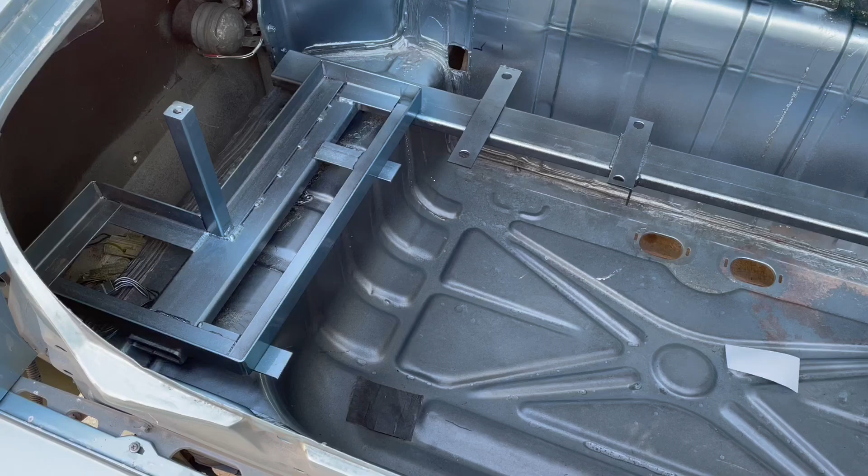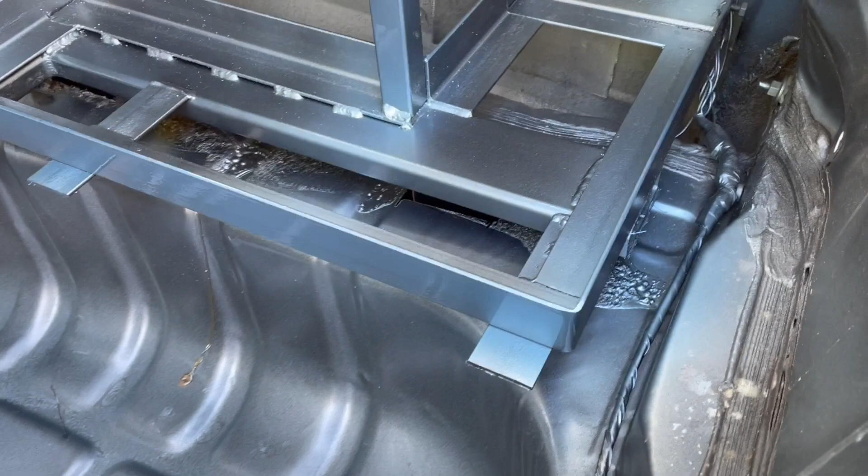Alright, so I went ahead and based and cleared the rack. The parts that you're gonna see, which is really just that. I put a little base back here just to protect it a little bit, but none of that's gonna be seen.

It's gonna be all covered. So now I'm gonna go ahead and paint the batteries, base coat and clear coat, and those are gonna be navy blue. So that's next.

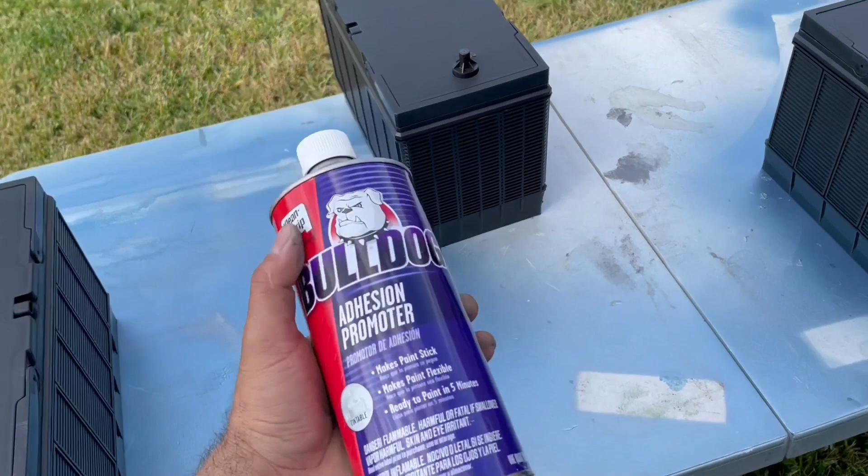All right, here are the batteries, guys. So anytime I'm painting batteries or anything plastic, I use an adhesion promoter. This Bulldog is pretty much the best in the business. I use this on a regular basis on anything plastic or flexible. It works great. So I did wax and grease, cleaned them up real good. They're brand new batteries, but they've been dusty, moving them in and out of the trunk for fitment and everything. So wax and grease, I'm gonna hit them with the Bulldog adhesion promoter and then let it dry and then go straight to base and clear. I do 2 coats of base and 2 coats of clear. So I'll bring you back when I get closer.

All right, there you go. 2 coats of base, 2 coats of clear. Came out really nice. It's a midnight blue. Oh, a little bug right there. Gotta get him out. Get around to this side.

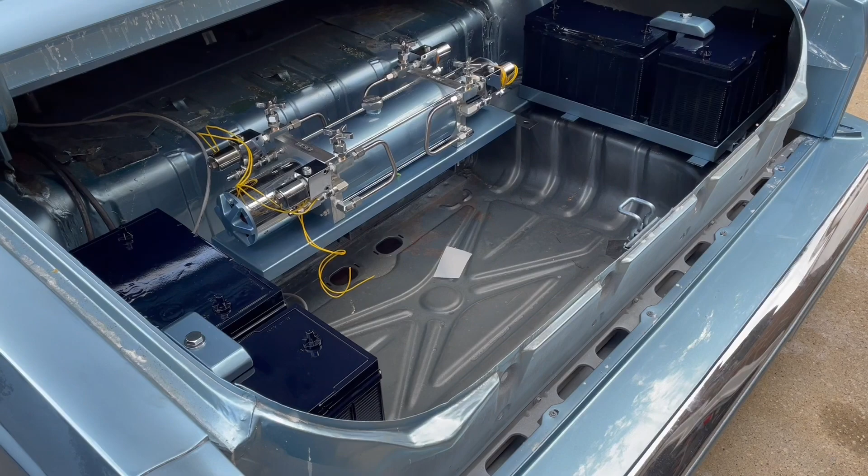Really like this color. It's really dark, looks just like the interior. So here it is with the batteries, guys. You can see the color a little bit better on the batteries now, I guess, now that it's up against the light blue. Came out real nice, I like them.

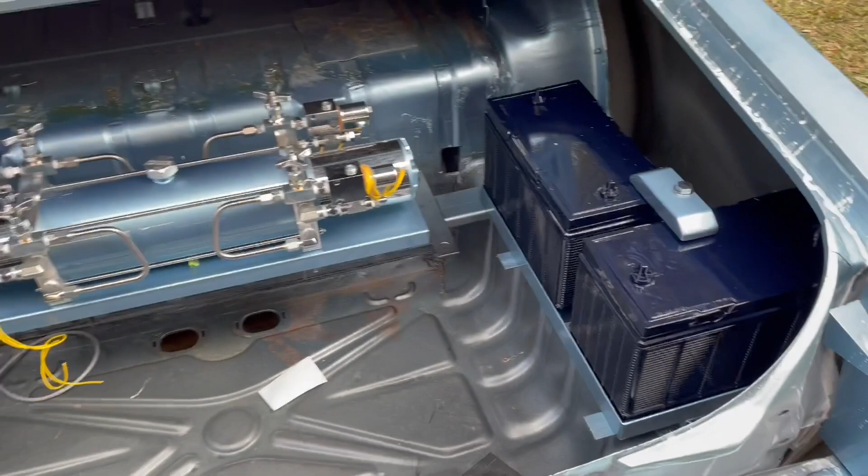Rack came out nice. This is shiny. I like the hold downs.

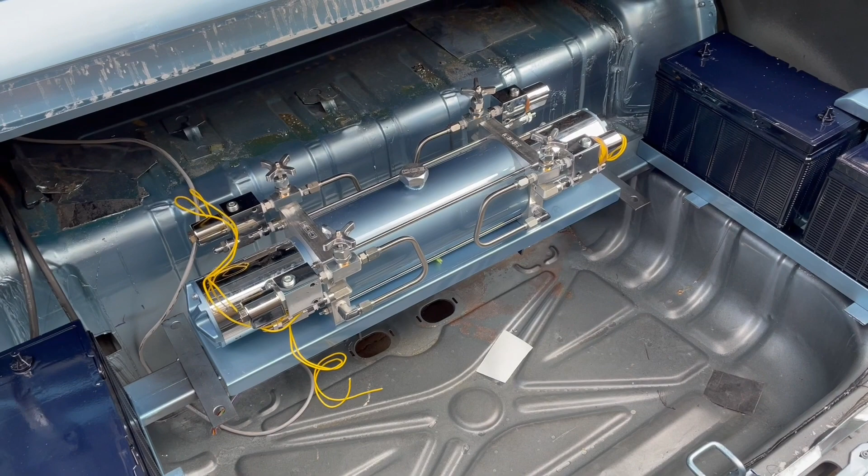So you see it coming together now. I still need to hard line the dump wires, so I'm gonna have to make some holes on the pedestal and just run the wires through the bottom so it can be hidden. Everything's gonna be hidden as much as possible.

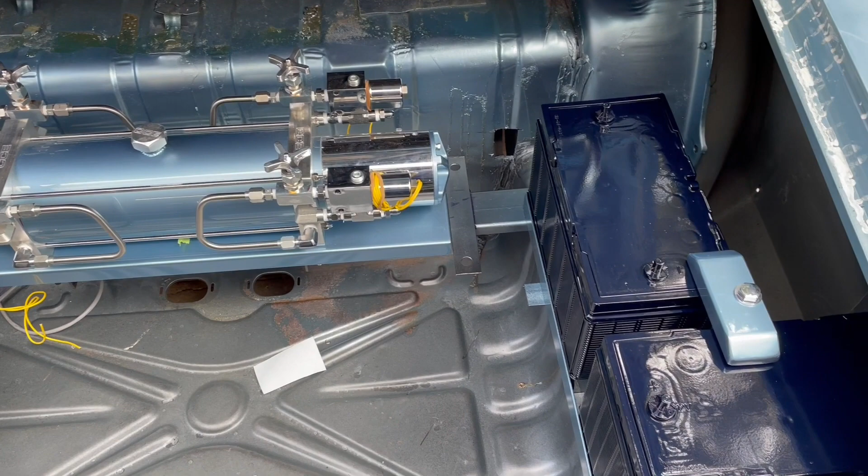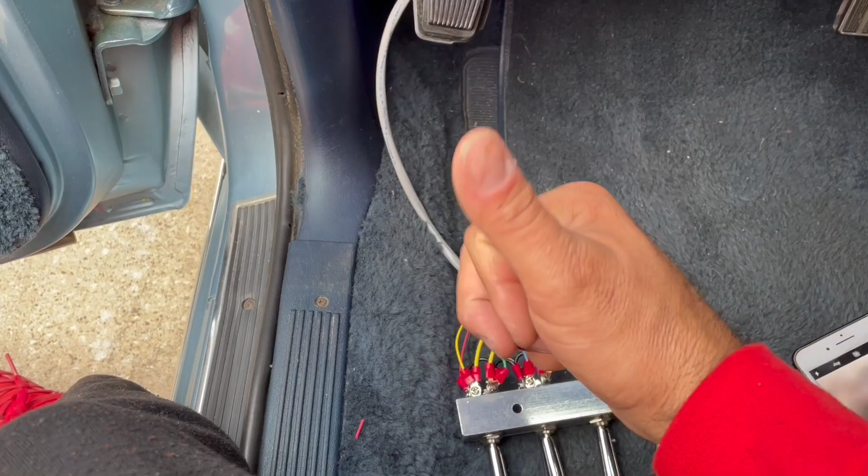All right, so I had already ran the wiring to the back of the trunk. My boy Lone Star came and wired this, and he finished up the hard line for the pressures while I worked on the cables for the batteries and just running other wiring.

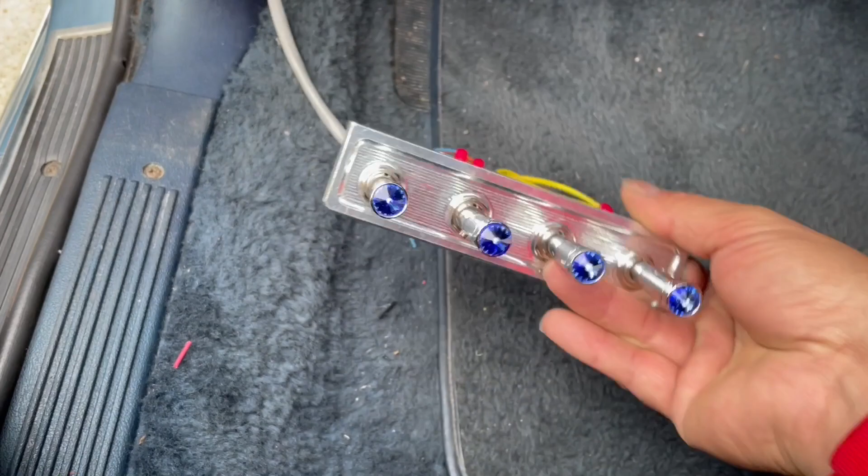So I just wanted to show you the sequence of the switches. It's kind of hard to do this with one hand, but here's the wiring. So you got 7 wires, right? 4 for the dumps, 2 for the pumps, which go to your solenoids front and back, and then red for the 24. So right here, front is going to be this switch.

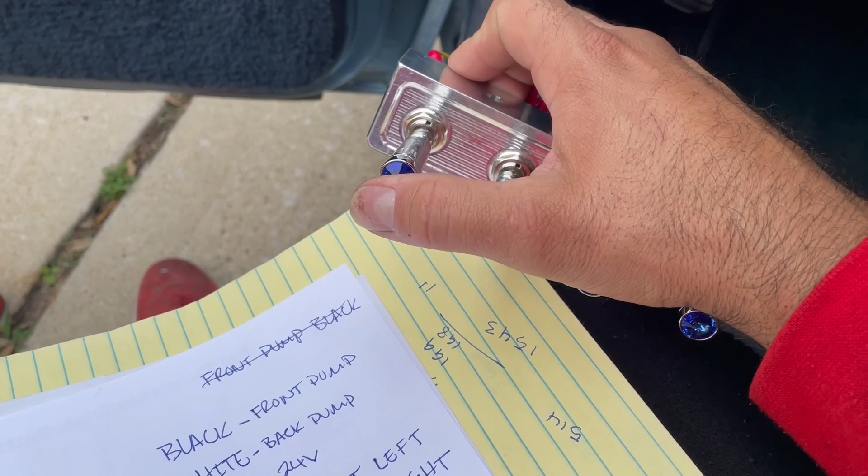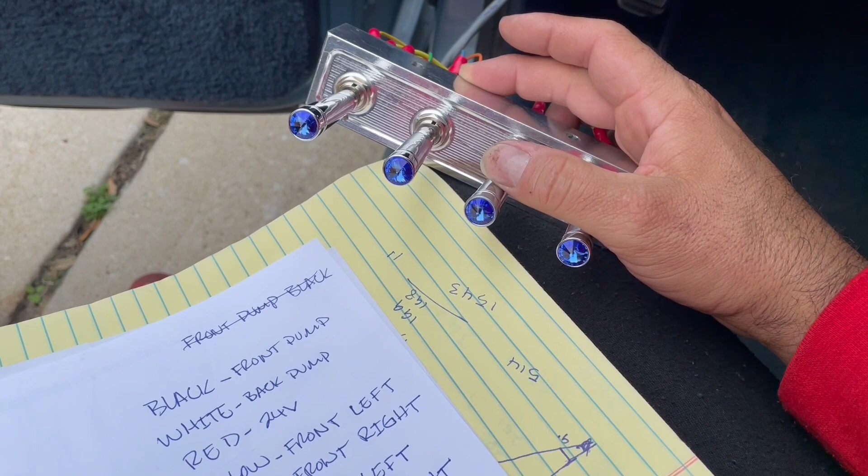This is up and down front. Second switch is up and down back, and then the third and fourth switch are the dumps. So if you go down, it's going to be left and right for the back, and if you go up, it's going to be left and right for the front. So these are just dumps. So front, back, and then your dumps.

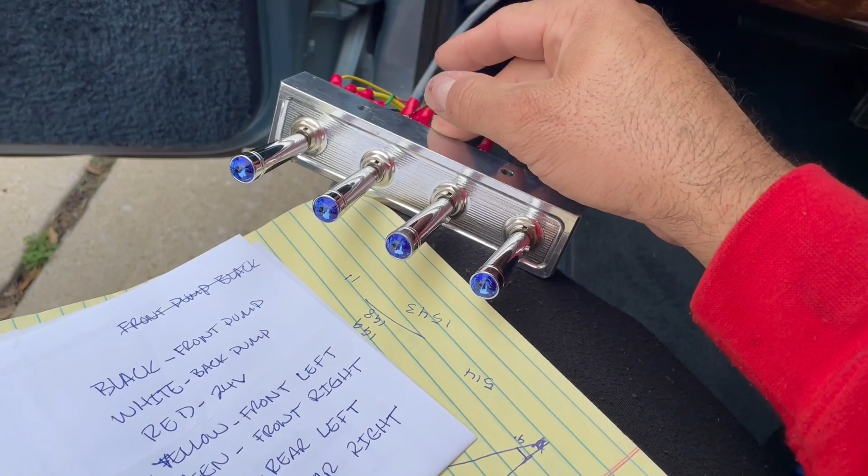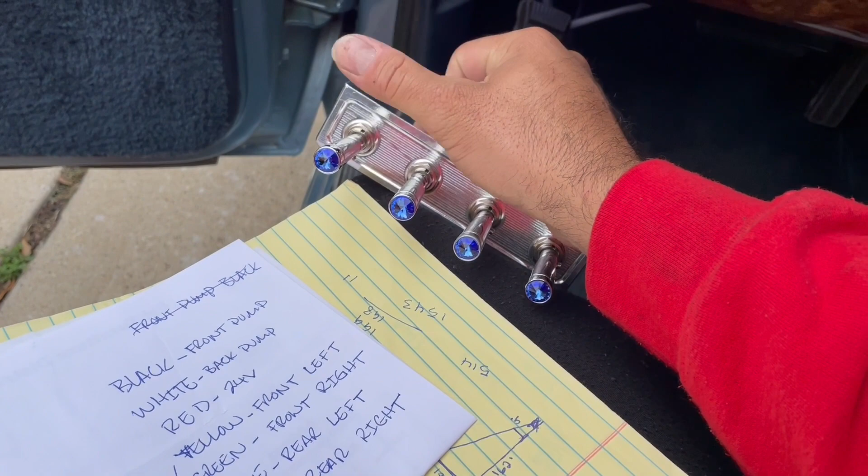On the Rocket, I got it set up a little bit different. So on that one, it also has 4 switches. It's got front, back, and then this one's like a whip. Like if you go up, the back goes up, and if you go down, the front goes up. So it just kind of whips up, front and back pretty quick.

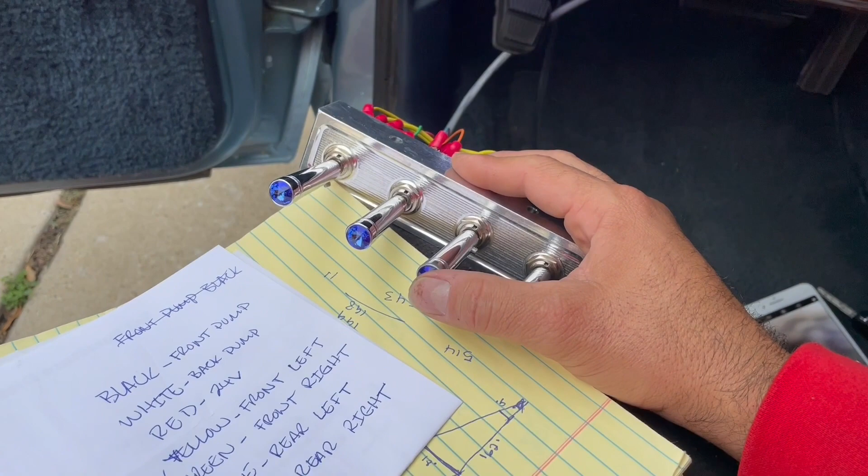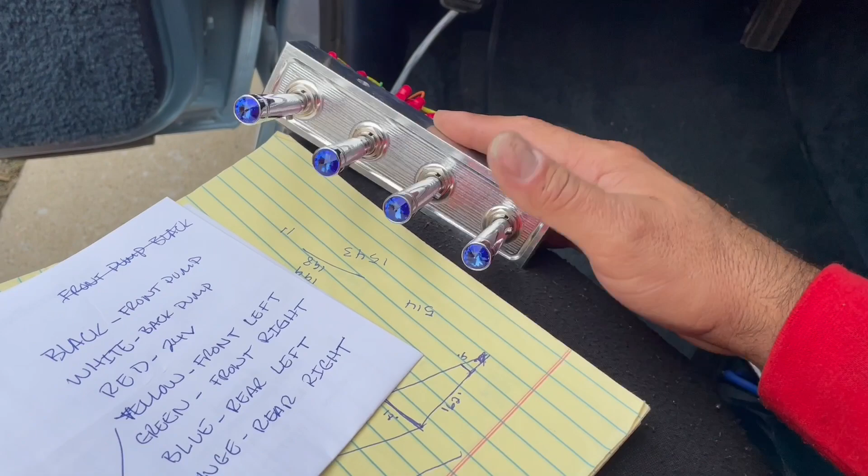And then the fourth switch on the Rocket is the corners. Down is right, and then up is left for the rear corners. So there's a lot of ways you can wire these things.

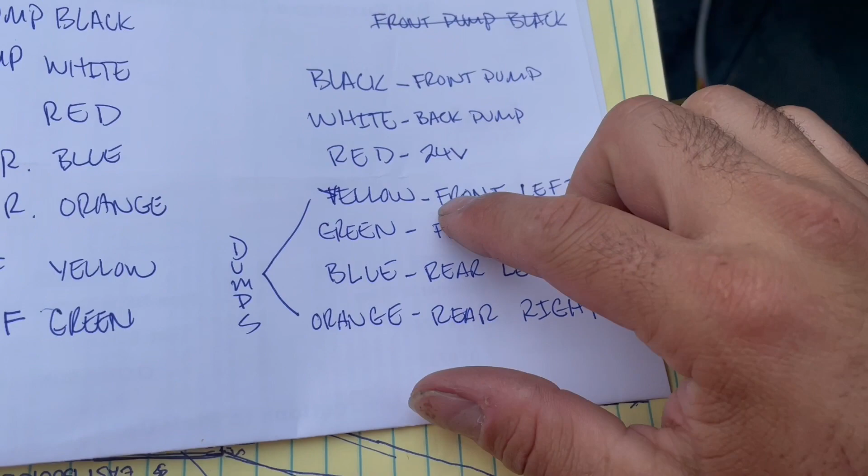So I just wanted to go through the wiring on here, and also to keep a reference for myself, because sometimes I go back and I gotta relearn things. So here they are, here's the wiring. Again, 7 wires, right here and here: black, white, red, yellow, green, blue, orange, and here, there. This is how they're wired on the switch panel right there.

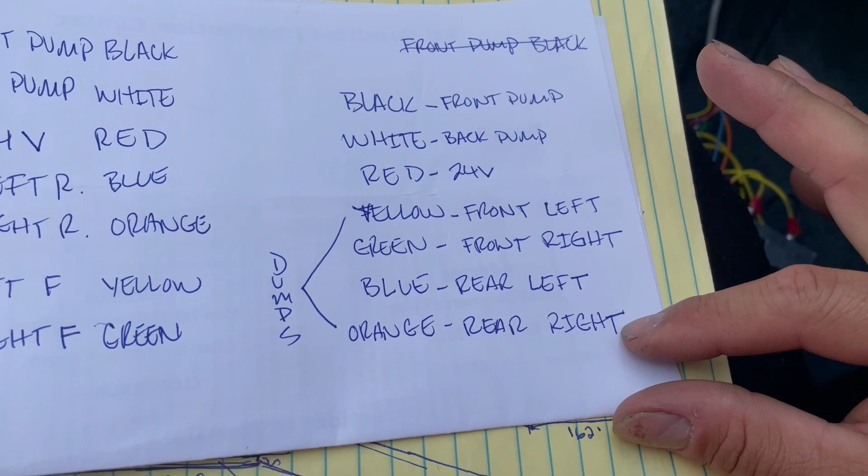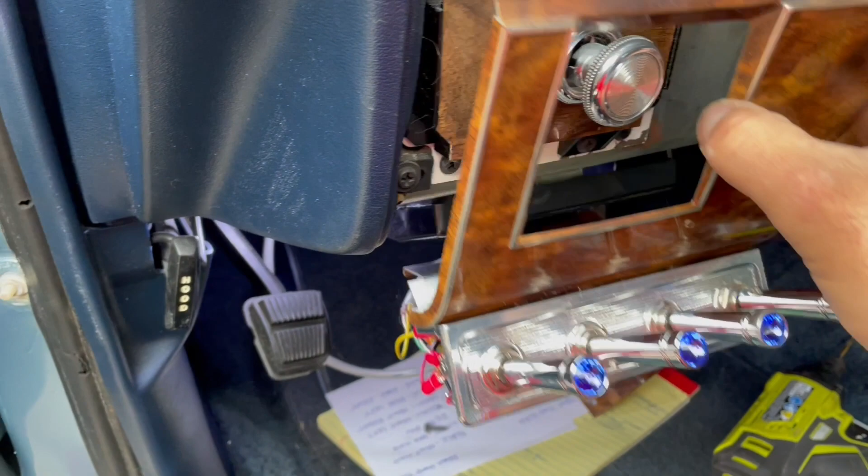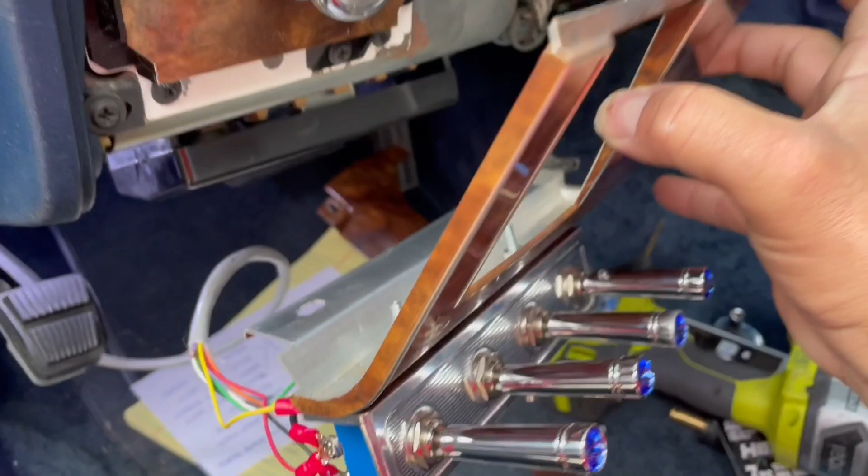All right, so I'm gonna use this panel right here for the switch panel. I haven't screwed it in yet, so I can show y'all. So this is aluminum, it's not wood, it's not real wood grain. So there's your 2 screws right here, and they don't interfere with anything there. So I'll go ahead and put this stuff back together, and then I can put my switch wire up.

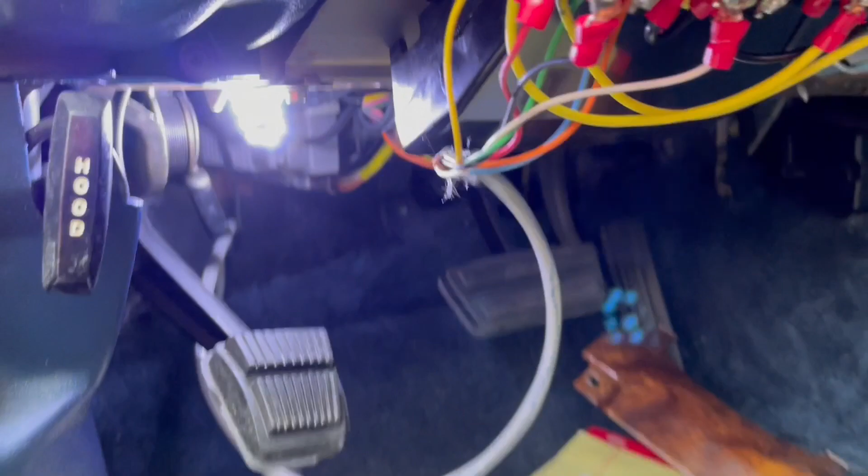We also got some LEDs. They're really nice, they're really bright. I don't know if you can see the one over there. Some over here.

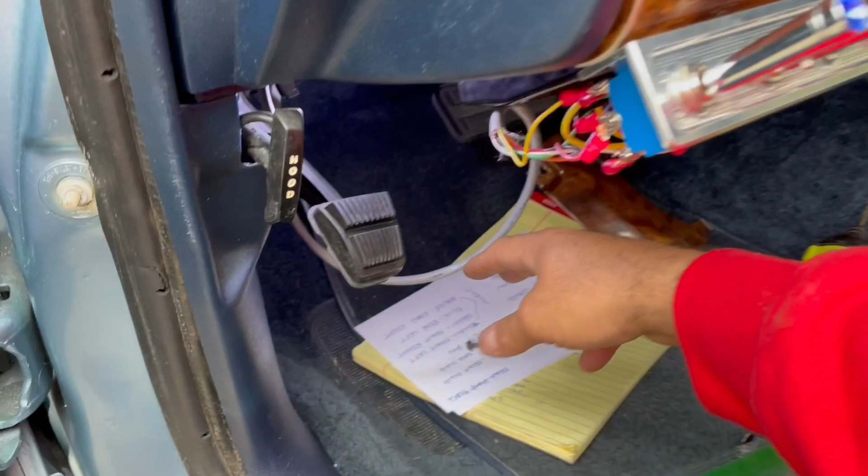And I got the ones for the roof, but I need to take off this headliner so I can redo it. And then I have some over there for the sail panel. I'm not sure what I'm gonna do about the upper lights. They work, they light up, they have a very faint yellow color to them, so I may leave those like that, or maybe, I don't know. I haven't decided. But anyways, the interior LEDs are really nice, so I'm gonna go ahead and bolt this up, and then maybe zip tie that somewhere secure where it's not in the way, and then put the rest of this together.

All right, so there it is. It's all mounted, everything's put back together.

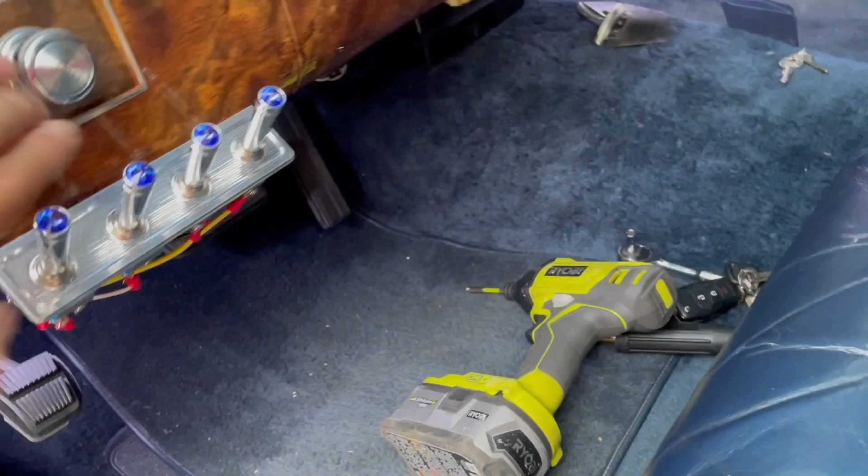Approved? Is it approved? Yeah, okay. So now we're gonna change it. Front, back, corners, there you go. And that's really nice, it's nice and sturdy. I want it gold now. Gold? Okay, take it off. Just take it off.

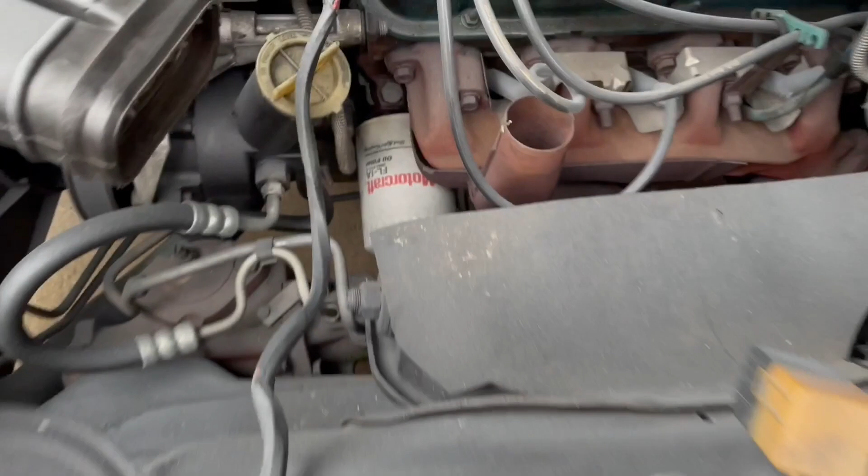Alright, so now we're gonna start changing into the front suspension. The rear is all done, it's got all the cutouts and everything, so I'm gonna jack up the car.

Get these shocks out, drill some holes, and remove the upper A-arms on both sides because I'm going to extend them.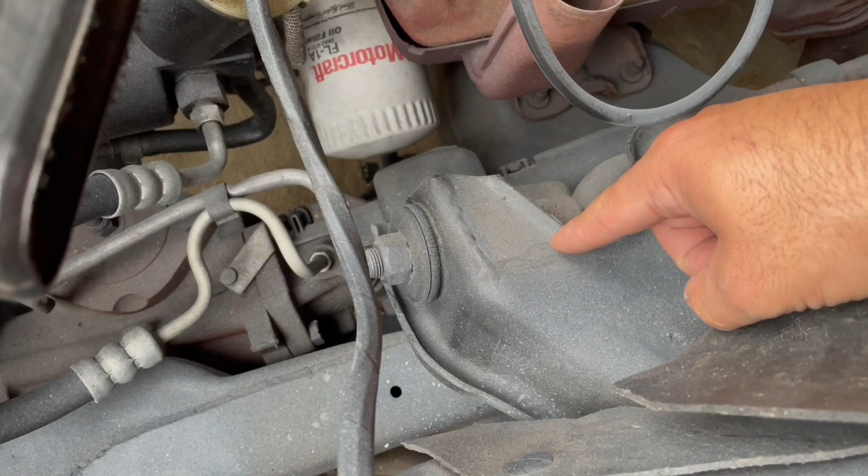See, a lot of this stuff here is going to be cut out. Like all this, it goes down to about right past right here, maybe about right there. All this gets cut out, and then I'm going to do a straight cut here. Boom, on both sides, and then add the metal between, right in between that line, just 1 inch, 1.25 inches.

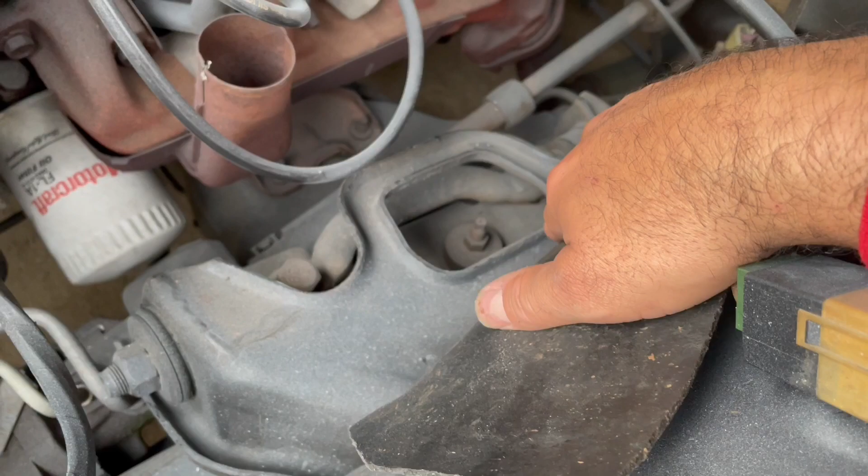So that's the next project on the hydraulics, and then I also get to run the hoses. So let me start taking this stuff off.

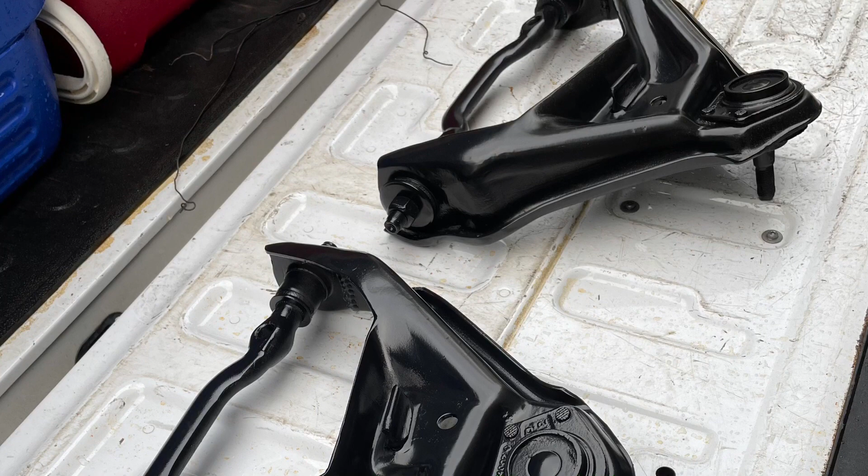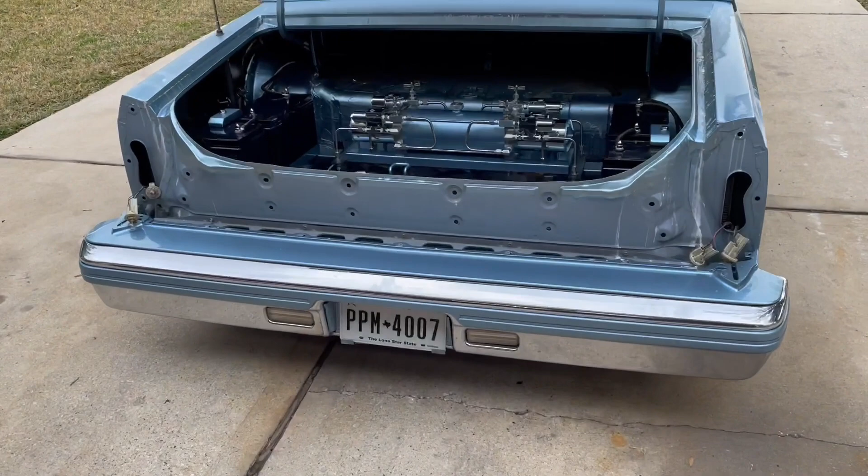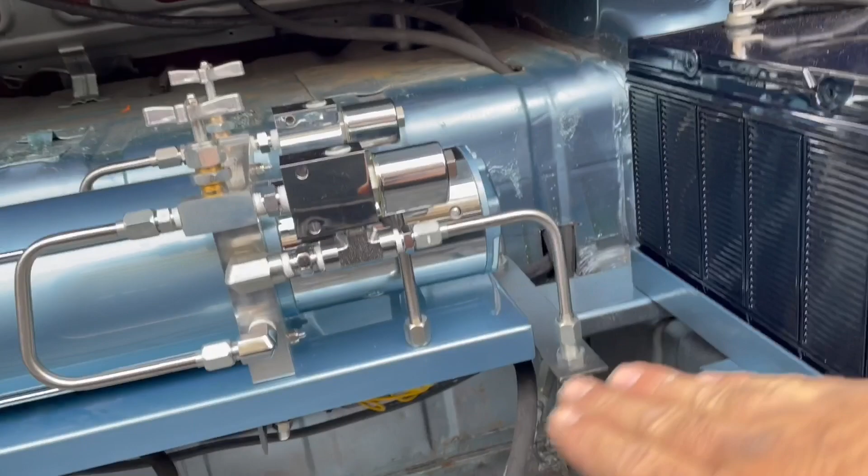So I got the hydraulics done, guys, for now. The only thing left to do in the trunk is the paneling, which pretty much makes everything look pretty. So it's gonna have a floor here, and then there's gonna be 2 separate pieces on each side of the whammy that go around the hard line here and to the back. It's gonna be a little weird shape, but it's gonna cover the hoses over there on that side, so you won't see the hoses.

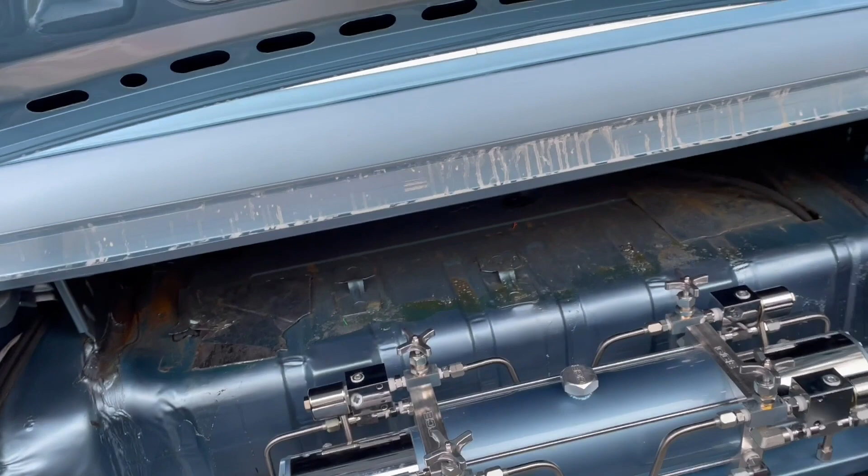And the same for over here. And then I have the side panels, and I'm gonna put a whole panel over here in the back, right here, right past the hoses. And I'm probably gonna do that one last because I'm gonna put some music in here. But there it is.

I'm gonna skip the paneling for now because I really need to wet sand and buff this car and put it back together. I've been holding off on that for a good little while here, just trying to get other stuff finished up.

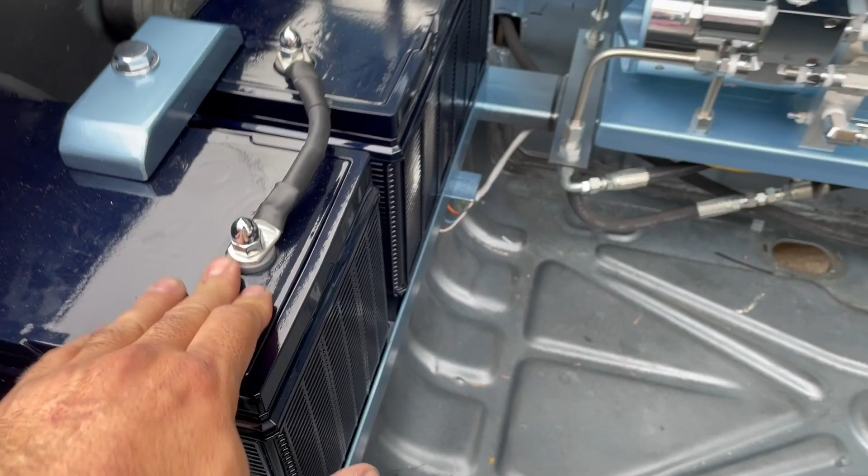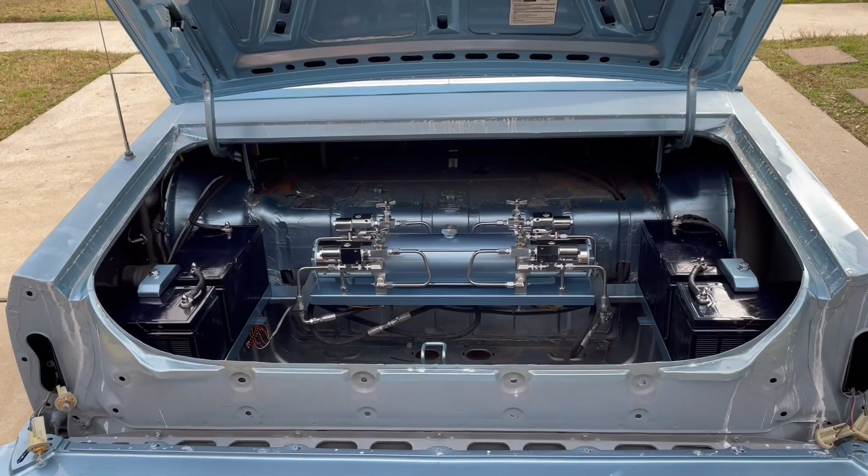I got 10-inch cylinders in the back, 8-inch cylinders in the front, and there's the car just completely laid out. Got the 13s on it. I didn't have to do much modifications to fit the 13s other than the bolts on the caliper in the front.

They were hitting the wheel a little bit, so I just shaped them down maybe like 1/8 of an inch, and they were able to work. I did buff out the front end and put the front end together. As you can see, I got my gold pieces in. So the header panel forward is buffed out. The paint looks really nice. I'm really loving the new color with the gold.

I still have a number of gold parts to put on, but I can't do that until I finish buffing the car, you know, put the side trim on and all that other stuff. But overall, man, I'm really happy with the car so far. I'm real excited to get this thing going.

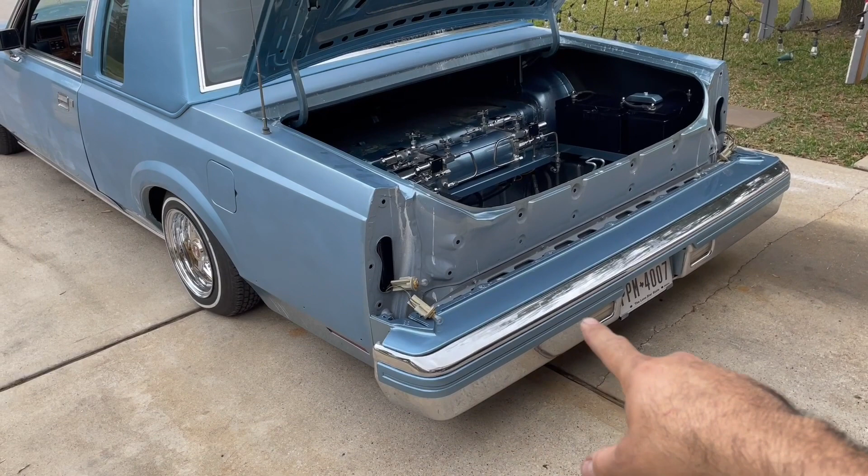So I still need to assemble all this back end. I did get the bumpers on. I'm not sure where I left off on the paint parts, but I did paint all the inserts to match the color of the car, and that's going to be all the way around. That'll probably be shown in the next video.

I also did extend the upper A-arms 1.25 inches. That was my first time doing these arms. They're kind of funky, but they came out really nice.

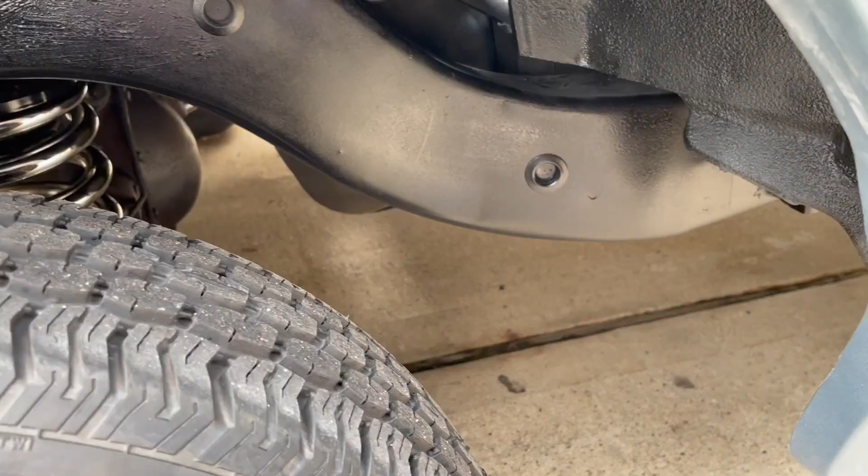Let me lift up the car and show y'all the undercarriage. So start here in the back. As you can see, everything's painted, wheel wells, everything.

So I'm running coil-unders, again, 10-inch cylinders with 1-ton pre-cuts. I didn't want to put anything chrome under here, but these were the only sets of springs that I had. They were chrome plated, brand new, so I just went ahead and ran them.

I welded a deep cup on the axle, and then I'm running deep cups up top. So that's locked up right there, front and back. Let me show you the front here.

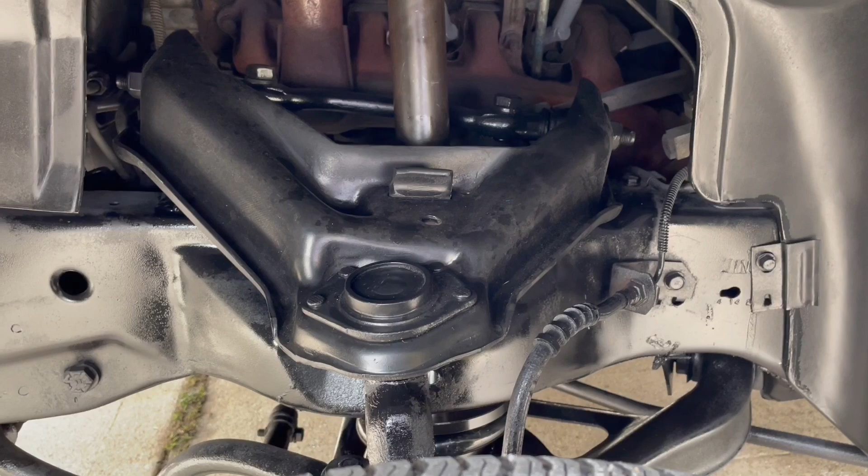So these are the arms. They look stock, and that was what I was going for. I did have to cut off a big piece around here, and I extended them 1.25 inches, and molded all the welding in, so you can't really tell where they're extended from.

All in all, the arms—that was my first time doing these. They took me 8 hours for both of them, from start to finish, from cutting them all the way to epoxy. They're in black epoxy now, and they came out really good. I'm happy with the way they turned out.

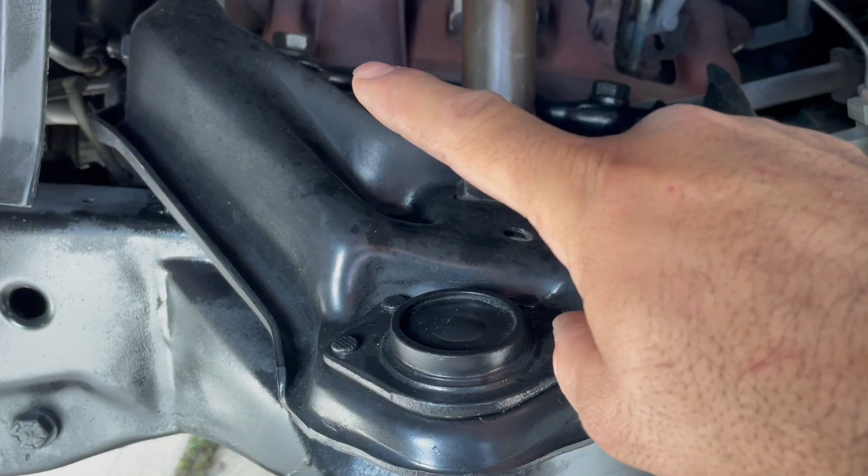These arms, where these bolts are up top, have a lot of adjustment, so I don't like my wheels kicked out too much. I actually like them to wear evenly, so they're pretty straight. As you can tell, they don't have a big tuck, I guess that's what people call it. I really don't like that. I like my wheels to be straight when I lift up my car and straight when it goes down.

So I extended them 1.25 inches, and then with the adjustment on the frame, I moved them all the way in. I could actually kick them out quite a bit, but like I said, I like my tires to wear evenly, and it just makes for a better ride, because this tread is already thin, man. Look at that. With the extension, you're only riding on one side of it, half of the tread, and then your car tends to walk all over the road, and I hate that.

People think it looks good, or they can say whatever they want, but at the end of the day, that rides like crap. You can't steer at all. So take it as you will.

Here's the back. This part of the exhaust is going to be cut out pretty much from the muffler back, needs to be replaced. Everything from the muffler forward is new, but you can see the back, it has holes, and well, it's kind of rusty.

And then the shocks—I'm also going to replace the shocks. I got a couple of brand new shocks coming in. I like riding shocks in the back just for a little bit of comfort. Again, 1-ton pre-cuts all the way around, and man, so far it rides pretty good.

That's it for the hydraulic video until I panel the whole thing, and then I'll make another video of that.

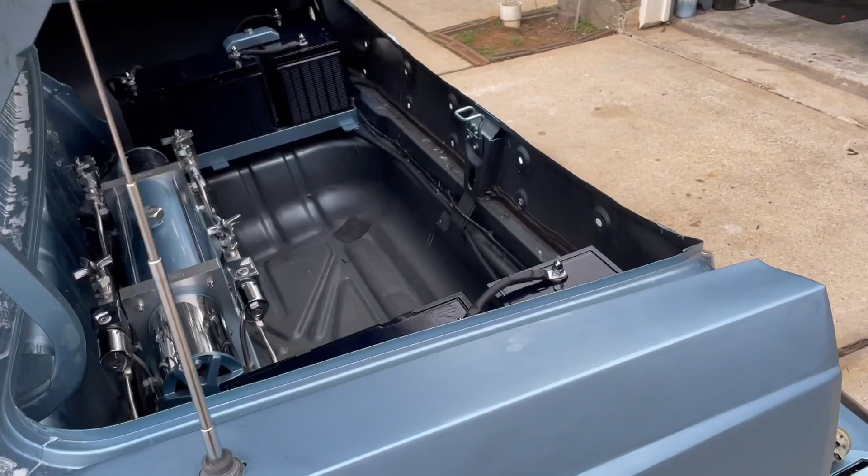I'm going to be using vinyl and 1/4 inch MDF wood to make the cutouts, and then I'm going to dye the vinyl. I wasn't able to find vinyl the actual color of the inside—everything was a lot lighter. It looked kind of funky, so I have the navy blue vinyl dye that you spray from a gun. So once I wrap everything in the blue vinyl that I have, I'm going to spray it to match the interior. So all this is going to look real nice once it's finished off.

So let me show you the car in a couple different positions, just front and back. And we'll have more to come once the car is completely buffed out and assembled.